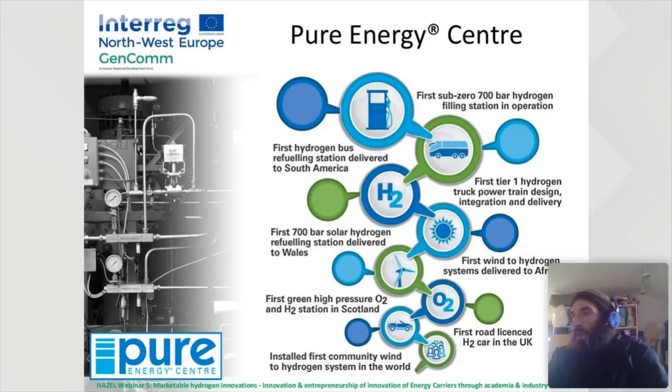We're quite innovative in our approach to things, and whilst we started from a small community-derived project about 14 or 15 years ago, we've slowly built up a number of innovations as time has gone by, and as you'll see, can do the production of hydrogen from a variety of clean energy sources.

And as I mentioned, a sort of a one-stop shop. You can sort of see here on the left some of the storage technology. I noticed one of the questions in response to the poll was around storage, and that is a key element of hydrogen going forward, is the continued development of advanced storage techniques.

So a more traditional approach to what people might consider renewable hydrogen is you have a renewable generation connected to the network, and the renewables either directly, or the surplus of that generation, is used to create hydrogen through a process of electrolysis. That is often stored at a lower medium pressure, and for end use applications, of which transport is a major end use at the present time, it's compressed to high pressure, stored and dispensed for that end use application.

And in the previous slides, you would have seen a real hydrogen bus. So that is technology that is here and now and is currently working. But in this particular project, it's a slightly different take on the same concept, if you like.

So in this particular example, we have a large municipal organic waste processing plant, and it also incorporates now fish waste from a lot of fish farming and fish processing in the local area.

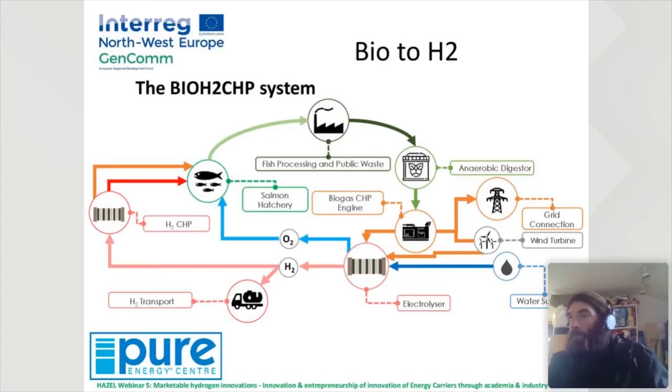So in this example, there's a very modest electrolysis plant, of circa 30 kilowatts, and if running at full capacity, can generate around 12 kilos of hydrogen per day.

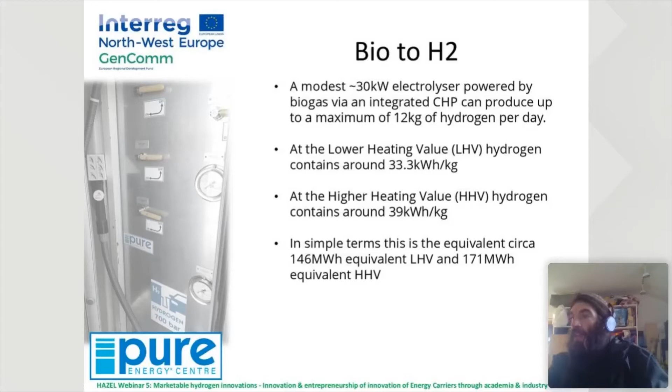A kilo of hydrogen has two energy values, the lower and the higher heating value, as many listeners will know. For transport applications, it's typical that you use the lower heating value, and where you combine the heat and power production from the end use, you can extract the higher heating value. So in simple terms, the hydrogen electrolysis plant can capture circa 146 megawatt hours of equivalent energy for use in the transport applications at the facility, which is not insignificant.

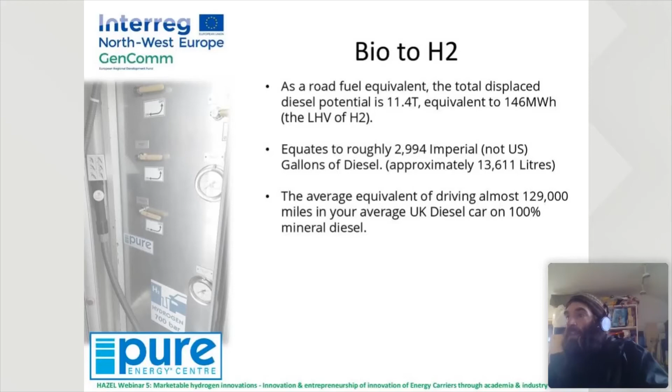What that roughly equates to is an equivalence of about almost 11.5 tons of equivalent road fuel displaced, which is about a little over 13,500 litres of diesel equivalent that would otherwise have to be sourced from hydrocarbons. And that, for the vehicles, is equivalent to almost 129,000 miles of driving, if you were to measure it in distance or clean miles.

And the side effect of that is that we have the potential there to save about 35 tons of carbon dioxide equivalent annually. And you can convert that into a sort of trees equivalent.

Now, this is subject to quite a significant amount of variation, but if you take a very average tree in an average location, and something like a pine tree, literature suggests that would absorb somewhere in the region of around 10 kilograms of carbon dioxide per year, and at a fairly standard planting density of around 1,000 trees per hectare. This very modest electrolysis plant has the same carbon saving effect, if you like, of planting around 3,500 pine trees, or about 3.5 hectares of pine tree plantation.

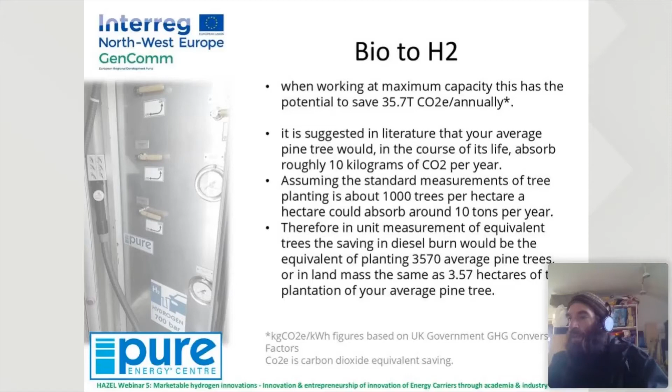Now, if the trees were to have been planted on unsuitable ground, such as peat bog, then you wouldn't realise such a good carbon saving from that tree planting. Likewise, different tree breeds would offer better carbon savings. But this is just averages based on what we've learned in the local area around Scotland.

So a few key findings from what we've observed over the last few years from the plant operating is that something that was quite innovative about it was the diverting of organic waste from landfill to anaerobic processing. That reduces the amount of unprocessed waste that goes to landfill, and therefore the emissions and carbon and methane emissions that would have come from that if it had just been dumped in a hole, as it were.

We capture the waste oxygen from the electrolysis process. In many applications where electrolysis is used to generate green hydrogen, oxygen is vented rather than utilized. In this project, we capture the waste oxygen and put it to use in fish farming applications, where there's a significant requirement for oxygen use.

By utilizing this waste product, we displace a significant amount of kerosene or diesel consumption through the use of on-site combined heat and power generation, and using hydrogen in road transport applications as well.

By managing the on-site energy generation, we minimize the impact on the embedded generator on the local network. In a lot of remote parts, embedded generators can have a significant impact on the local electricity network, and by managing that generation through the application of hydrogen technology, the network constraints can be better managed.

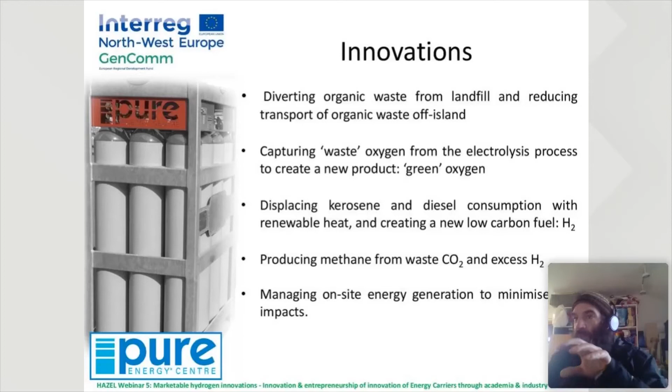A number of benefits can be realized to the local economy when you take a more holistic approach to a clean energy project, and that is to help secure continued development of the waste industry in the remote community. Rather than putting it all off island for processing, it can be processed locally and provide local benefit. There's better handling of organic waste in the remote community, and as mentioned earlier, you have a byproduct of high quality nitrogen enriched fertilizer from the output of that anaerobic digestion process.

There's a requirement to handle both the oxygen and the hydrogen, and that creates some work locally within the local employment market, and it helps stimulate the development of new hydrogen supply chains that can support the adoption of hydrogen vehicles and so on.

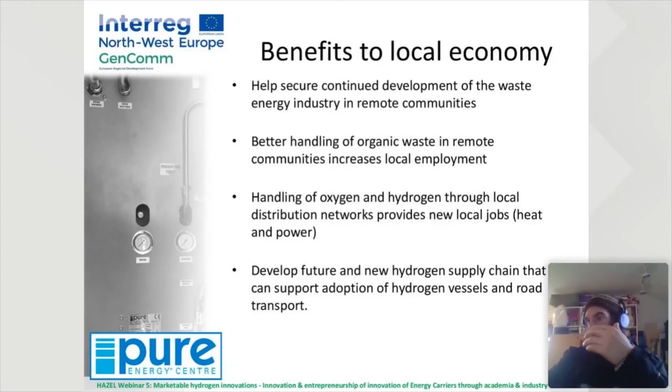As mentioned in a previous slide, there's an innovative part in this anaerobic digestion plant, and that's the introduction of fish waste. In remote parts of Scotland, there's a significant employer in fish farming and aquaculture, and it's estimated that they consume maybe around 40 gigawatt hours a year in the area, and the hatchery sites also have a significant requirement for low levels of heat, which equates to a significant amount of energy across a year.

Fish waste from the operations and processing has the potential to generate around 60 gigawatt hours every year, which would cover those energy requirements and further close the circle, if you like, for the new energy required into the process.

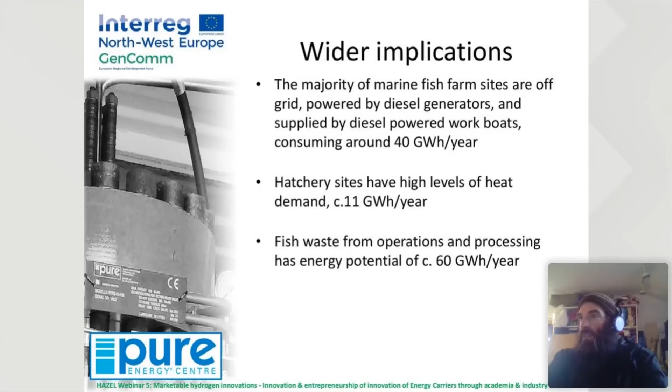So that is a very brief overview of bio to hydrogen, using the plant in the Western Isles as a case study.

Ross, excellent presentation, many thanks. I think you can take this as a compliment - hopefully you understate what has been achieved, and that you've developed a wonderful circular economy there.

And one of the great phrases you came out with - you have 129,000 miles equivalent of diesel saved, and you use the phrase clean miles. So if somebody is doing an average 20,000 miles a year, that's 6.5 years of transport on a personal car.

Yeah, on average - when you put it in lay terms, using the phrase you used, you're saving 35.7 tons of CO2 equivalent annually. But bring it down to something people can benchmark against: it's 129,000 miles, equivalent to 3,500 trees being planted in carbon saving. And you've developed that circular economy.

For folks, the bio-to-hydrogen plant is one of 3 pilots in GenComm. We have bio-to-hydrogen run by Pure Energy Centre, solar to hydrogen run by IZES and Dr. Bodo Groß and his team in Germany, and wind to hydrogen run by Energia and Mark Walsh and the team in Northern Ireland.

It's 3 different scales of renewable hydrogen production using electrolyzers and hybrid opportunities for application covering industry, transport, solar and heating. It looks at developing that model where we have that hybrid mix, and at the back end we have the decision support tool led by Dr. Rory Monaghan in Galway, to allow people to make informed decisions based on the data from the 3 pilots.